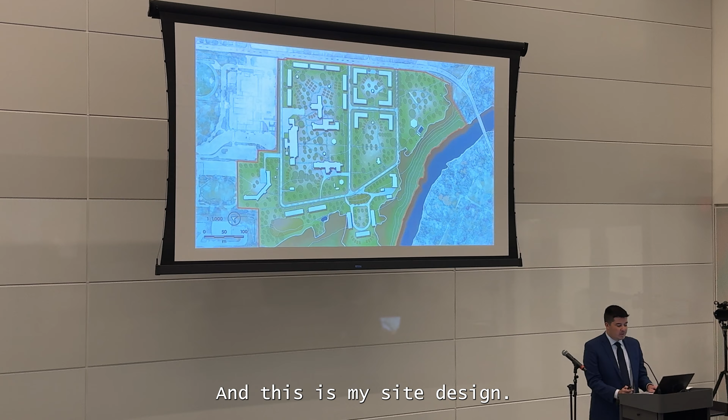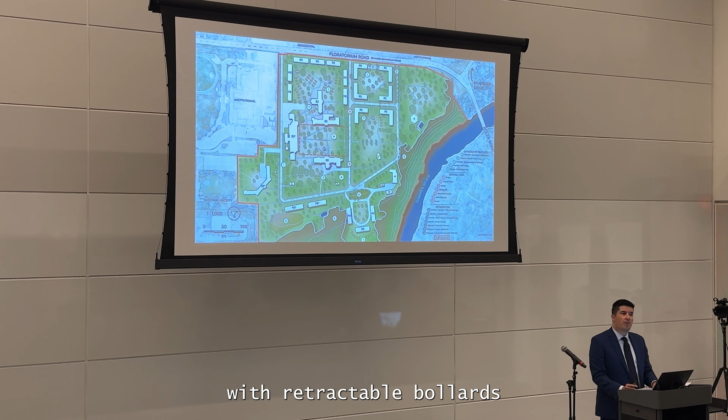This is the site before any design has happened. As you can see, over half of the site is forested, and it's surrounded by the Thames River to the west and south. The natural heritage of the site will be preserved, and I'll be designing east of the orange line shown. And this is my site design. Shown sideways for a closer scale, you can see the same tree drip line outlined in a white border and the Thames River on the right, and the rest of the site has been revamped. I've added one new road for additional fire access to some of the proposed buildings, and have limited vehicular access by the main quad area with retractable bollards so that people can feel safe walking around and enjoy the space.

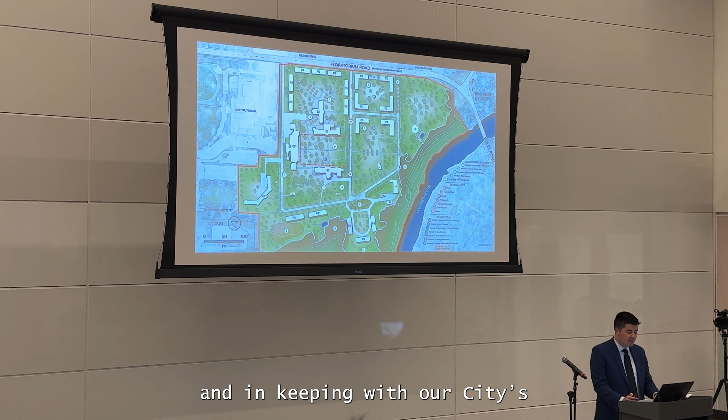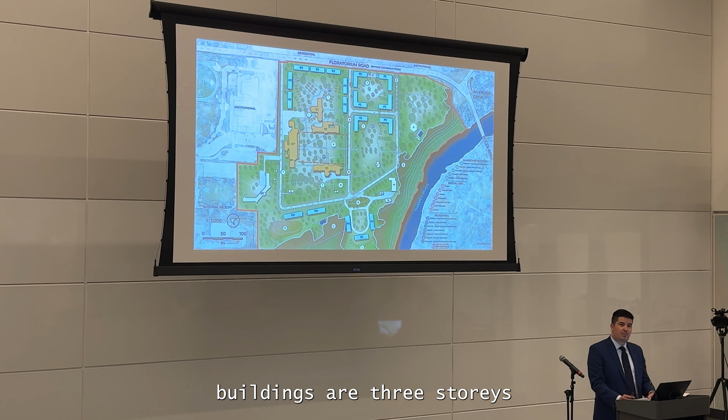Entrances to the site feature a small plaza and fountain, as well as a double alley of trees to provide a strong street presence and in keeping with the city's urban design guidelines. By retrofitting the buildings shown in orange and with the proposed buildings in blue, there are now a total of 257 units available. Interfacing with Sanatorium Road, I proposed two-story buildings to respect the dwellings on the other side of the street, and each of the proposed buildings are 3 stories beside some of the retrofitted buildings. Street parking is also available along each boulevard.

This community is designed in a way that allows groups of residents to have the autonomy of owning private space while also enjoying the freedom of shared community spaces at their own will. Shared elements are located in each of the residential buildings, with larger common spaces existing in one of the retrofitted buildings that will act as a great hall and living space as well.

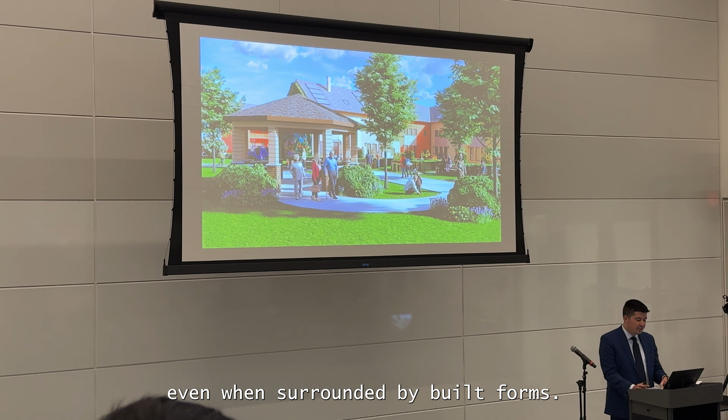This will include large common kitchens, living rooms, and of course the large quad and outdoor spaces, each being available to all. The retrofitted building will also serve as a hub for cooking classes, movie nights, and community meetings. The community gardens are located along the path network, so the intersection of ecology and community living is clear, even when surrounded by built forms. Bike parking is also available throughout.

Little Sprout Sanctuary is the healing garden where CPRI residents can heal and rehabilitate by immersing themselves in nature or by gardening their own plants in a designated area. This is one of the many landscape features added to the site, on top of the rain gardens, double alley of trees, and plenty of extra planting throughout the site.

It was important to me that this garden featured plants that stimulated the senses, whether that be touch, sight, or smell. Lavender and lemon balm offer calming scents, while red clover, sumac, and native sedge offer plants that are fun to feel. Within the rain garden and other plant palettes, the proposed options are native to North America and are able to grow in our local hardiness zone.

Because of this, the development would include a calendar of outdoor and indoor events like exercise classes, barbecues, and farmers markets that give residents the chance to give away extra food they've harvested in their gardens. Within the site boundary is a chapel, which is a great example of the site's history. While it isn't designated as a heritage building, I wanted to maintain and preserve this area so that people can enjoy the moments that matter most to them, surrounded by nature and cultural heritage simultaneously.